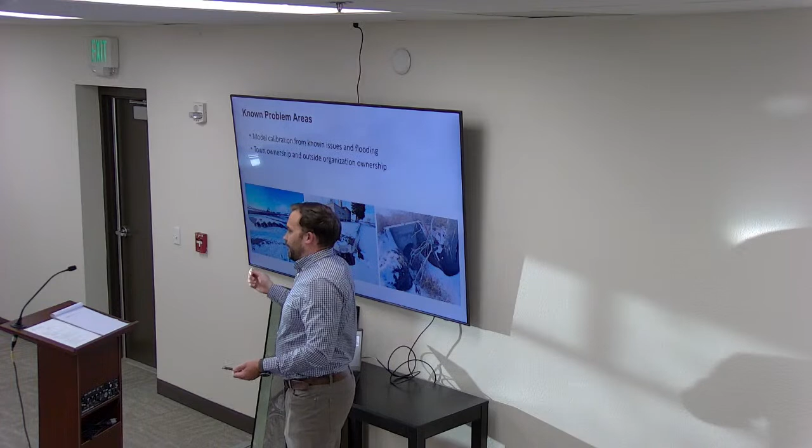So one of the other things that we need to consider, and this was largely fed by our field visit with Lauren and Andy, was known problem areas. Now, given that this is a brand new model, we needed something to calibrate it against. And unless you're extremely detailed and really curious about the depth of stormwater in a certain area, it's going to be hard to know that in the intersection of Main and First Street we had 6.8 inches of water. So when we're calibrating and validating a model, we need to know where the problem areas occurred and see if that agrees in the model environment versus what's been seen in the physical environment.

So just to give you some of the images that we looked at. Here is the crossing at Market and Highway 30, which is slated to be redone with a WYDOT culvert. So when we look at existing conditions versus future conditions, we incorporated WYDOT's design into the model. So that's already accounted for, and we're looking at how flows are going to be managed there.

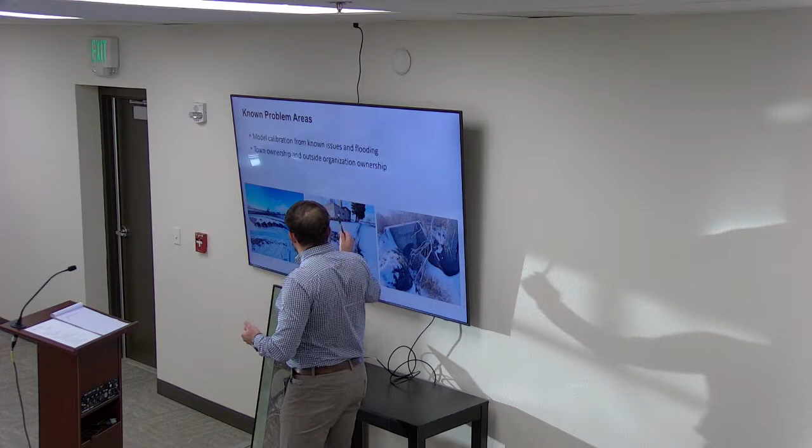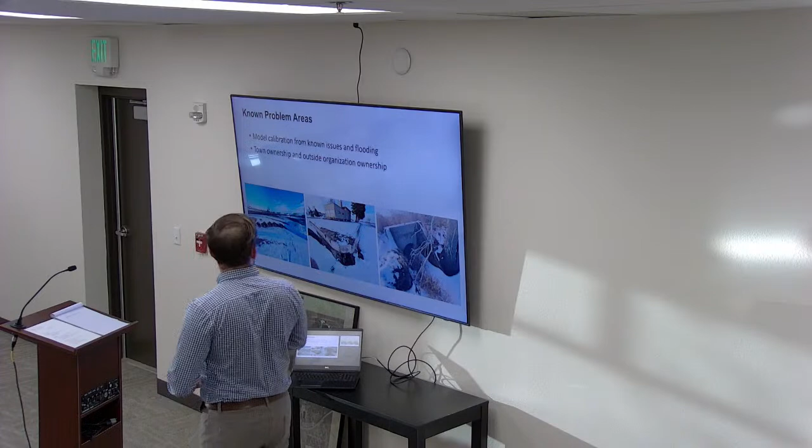Similarly, on the conditions side of things, and knowing that we have a fair amount of depth, we were able to go through. Our surveyors were in the field. They pulled sections on most every intersection that we had directed them to, specifically where there were inlets. So what we're able to do is, if we assume the worst case scenario, which granted would be above the curb, we can use the curb as a depth validator to say that, in a certain event, it's likely that it would fill up to this much, which is about a foot and a half in some areas on this curb for certain events. And then we tie all this in, we use this to validate our model, and then the next step is to run the model.

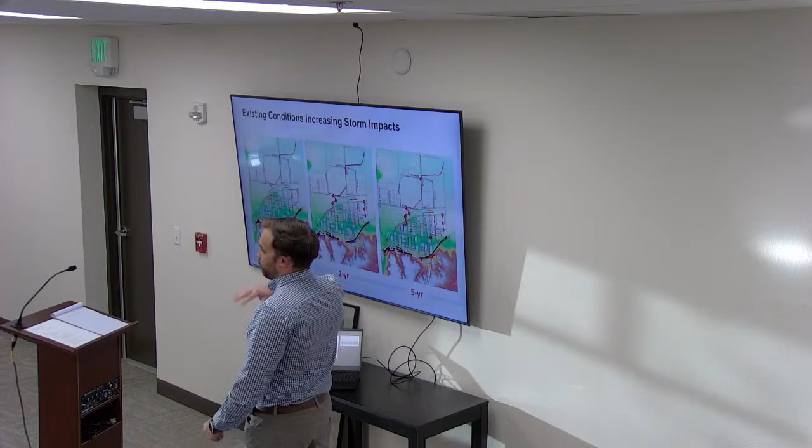So one of the deliverables from this project will be the fully functioning model in an InfoSWMM environment, so you'll be able to go through this at your whim and will to take a look at it and see what we've done here. But just to provide a little bit of perspective for this meeting, we went through and thematically mapped the existing network. Now, one thing to bear in mind before I get too deep into this: anywhere you see a big red circle indicates a node that has failed or has been surcharged to the point where there's overflow. So that's to say that if you have a 1 foot culvert in our model, and that culvert's failed, the water depth is well above 1 foot above the culvert and it's pouring over into a surface flow condition.

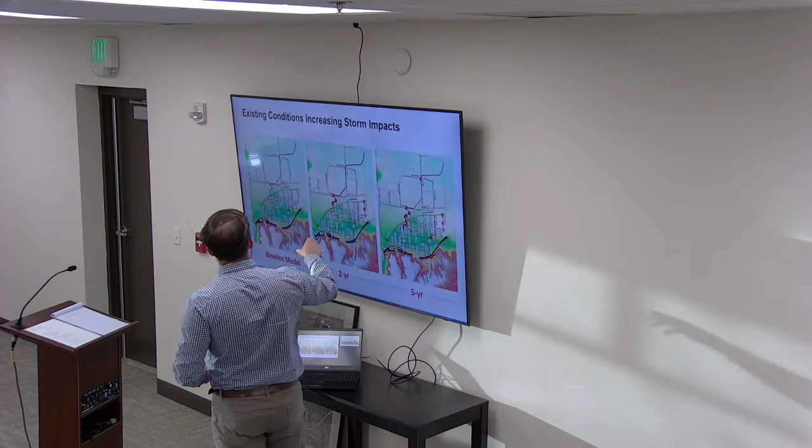So when we take a look at the baseline model, here's just the town. We haven't run any rain over it. That's the model network. The 2-year model is where things start to get interesting. We start to see failures in the area around Pine Bluffs Sand and Gravel, and then over here towards the Shrine and some of the eastern roads. Some of this, at least in the eastern portion of the model, was defined based on our own interpretation. Since there's not any direct stormwater infrastructure over there, we had to figure out some way to establish the links. But when we look at the 5-year event, you start to see that there are more points across the model that are failing.

Now, it's curious to note that some of these culverts and links are not necessarily owned nor operated by the town of Pine Bluffs, however they do affect you. So for instance, most of the points you're seeing here along I-80 are a WYDOT culvert that would be maintained by them and would have to drain effectively. So, baseline through 5-year, we start to see some failures in the 5-year existing conditions model. And as we advance this and get into the larger flows, here you can actually see, if we look at the line weight in between each of the links, the thicker it is, the more flow is being conveyed through that point.

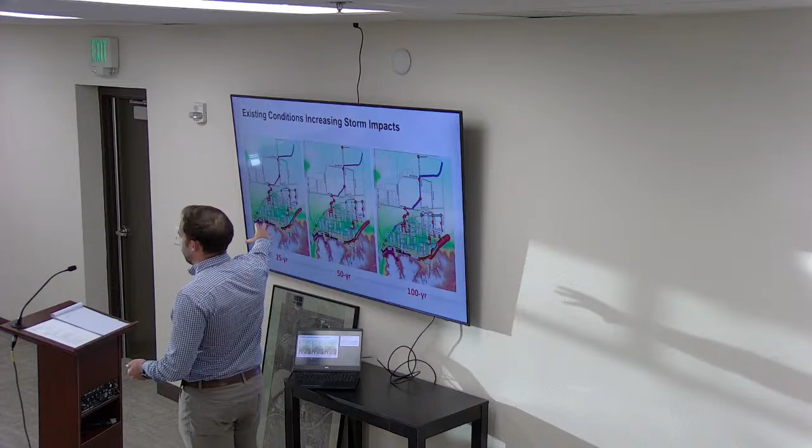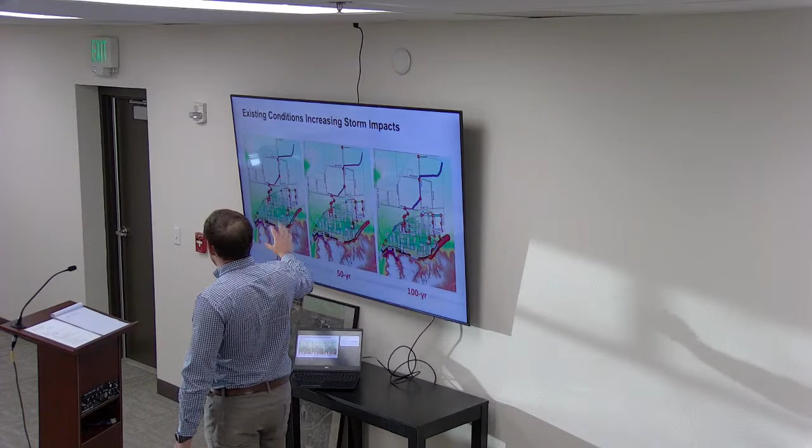And this will be something that will be further expressed in the master plan document itself, as to say, for an existing condition, 25-year storm, we're gonna be flowing, if memory serves, about 150 to 215 CFS down Market Street. It's a considerable volume of water. But when we look at the 25-year storm, you can see that most points across the system have started to fail. 50-year, kind of the same thing. The 100-year event is pretty much systemic failure.

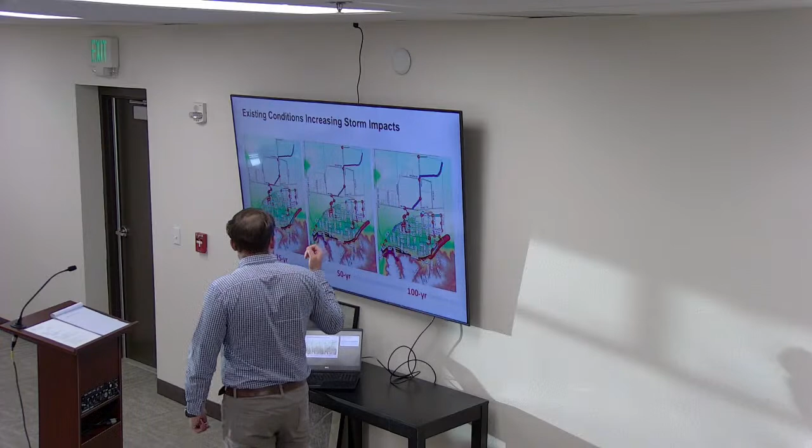It's a massive event. And at that point there's going to be issues no matter where you're at, with the amount of water that's going to come off of this. So the one thing that we needed to take a look at then was, what was the design storm going to be for the master plan? Some of this is to inform our efforts for design, and some of this is to help inform the draft ordinance that was developed.

So in looking at this, the one thing that's kind of curious to consider is compound probability. Now, compound probability, what I mean is, for a given year, if we look at a certain design storm, for instance, the 25-year storm, which we ended up electing to go with as our design event, we have about a 4% chance of a 25-year event occurring. Now, if we wait 10 years, that chance goes up to 32, almost 33%. So 1 in 3 chance of one event occurring within 10 years. So this will help us inform the priority in the selection of how we move forward with developing the CIP.

So with our CIP, we took a look at the areas that would have the largest benefit and tried to prioritize those with the consideration that we're designing for a 25-year storm and not looking at the higher events, given that the conveyance infrastructure would have been extremely large to convey the event appropriately. So, taking that into mind, when we took the existing model, the next step is to go through and develop scenarios to try and alleviate the problem that we'd see in certain areas.

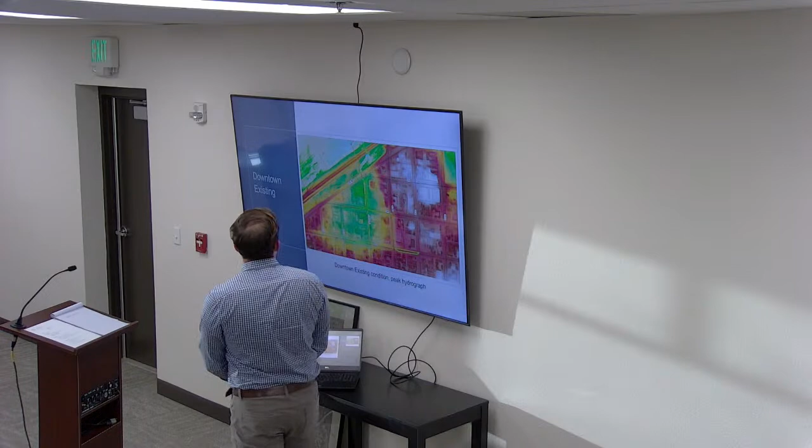So the first scenario that I took a look at, and there are many others that have been expressed in the master plan, was what would happen if we were to go through and modify the existing storm sewer, at least just for the downtown area. And the largest pipe that's currently provided in this storm sewer system, which you can see extends from Elm to Market and then up here to the outfall, is a 36-inch pipe. The 36-inch pipe at any one point in time is capable of passing around 50 CFS.

So the main goal here would be to upsize this as much as possible, try and get as much of that water off the streets into the storm sewer and out towards the North Wells area. So what I did here is I took a look at what would it take to get these depths down in the street along Market, 3rd, and Blair, and even here in the larger events along Market further to the south. I ended up sizing these up to about what would be a 6 foot by 6 foot box culvert equivalent.

Granted, this is just purely a sizing exercise, and further design would need to be done in the event that you elect to go through this, just to make sure that we're optimizing a solution that's going to be able to clear utilities, but still adequately pass the volume of water that we need to pass.

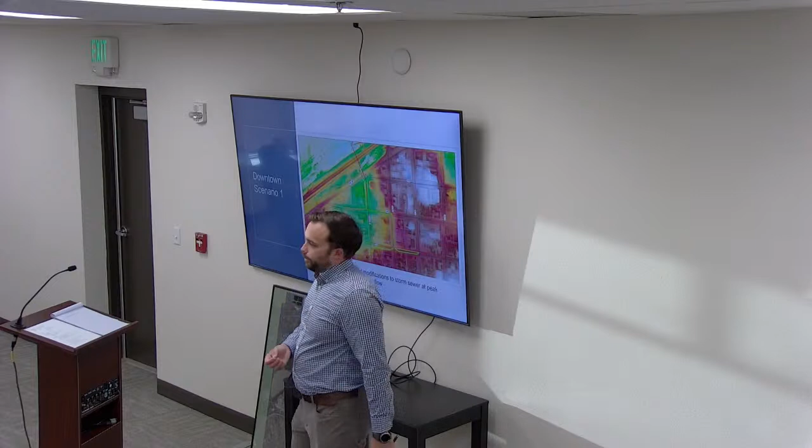Within this, also, alongside the upsizing of the trunk and the branch lines in downtown, I looked at what it would take to get all the water under the railroad, under Highway 30, and it ends up requiring about 2 pipes. The reason I tried to stick to around 2 is that no one wants to see 10 or so horizontal bores going under a railroad. They seem to get kind of touchy about that.

So what I looked at, in order to pass all the water from the downtown area, it's about 2 72-inch pipes worth of water that would be going under the railroad. So it's a fairly large endeavor to take an upsize to this. So kind of bearing that in mind, the next thought was to look at other solutions.

So the next scenario that we looked at for the downtown was what would happen if we purely upsized all of the downstream drainage going to the north. So currently, and I apologize that this map does not show that, there is a drainage channel that leaves from this outfall node and goes around to the southeastern entrance of Pine Bluff Sand and Gravel and curves up towards Road 213.

In this scenario, I took a look at providing a much larger drainage ditch and rerouted that instead of going around Pine Bluff Sand and Gravel to just go straight to the north, essentially, assuming here that excavation and easements are a lot cheaper than horizontal bores.

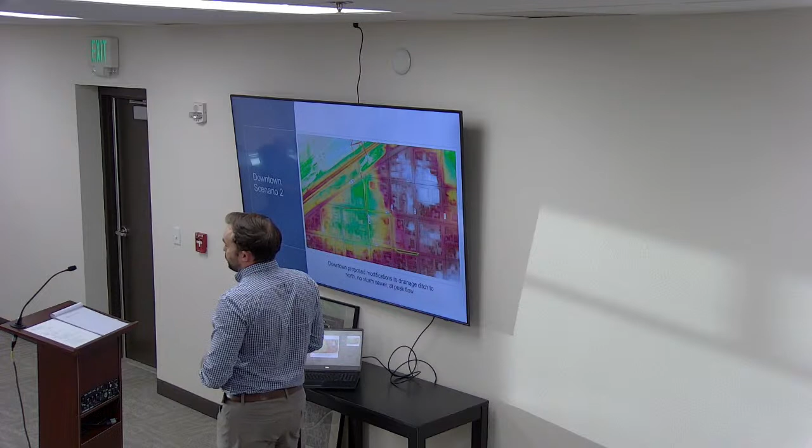So can you just tell me on there, you have that direct line going across and then you have the one further to the east. There are culverts at both of those? Yes, so these are culverts that have been installed beneath the UP line. There are 2 36-inchers and 3 48-inch culverts. But currently the straight one you show is non-existent, right? This line right here? Yeah, so that is in existence. That's the 36. So there are both of those already.

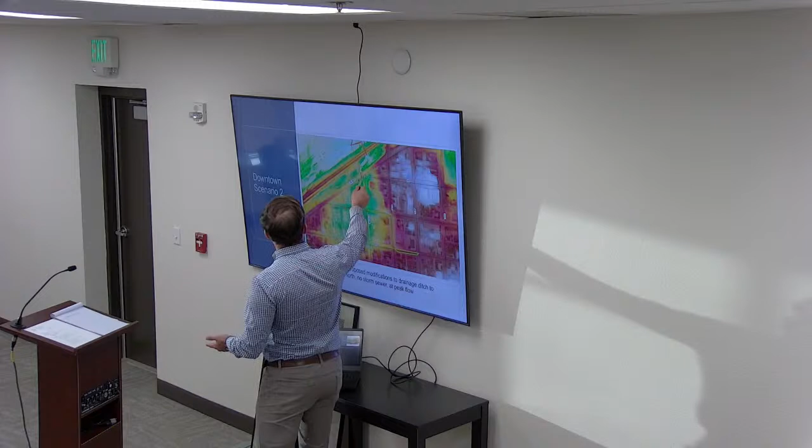Correct. Okay, thanks. Yep. And just the one thing we found, at least in the 25-year event, is that this line, which is the 36-inch line, is woefully undersized to get all the water off the street and out through there. So really working towards trying to optimize the capacity that we have in our existing system, but we're still gonna have to take a look at something here in town.

So, if we take a look at downtown scenario 3A, which is kind of a combination of the previous two scenarios, we look at expanding the in-town storm sewer and also doing the realigned expanded ditch to the north. We start to see much more promising results. Even without new culverts under the railroad? No, so this would actually require an enlarged culvert under the railroad. Okay. But there is, you're getting ahead of me. Sorry. No, so there is a solution where we do look at that.

And so within this, you know, we can start to see that our in-stream flow, or in-road flows are lessened. We're heading towards the right direction of getting below that 1 foot threshold.

And it's looking promising. So the final scenario, which would be combine all of these together, with the exception of upsizing the line that goes underneath Highway 30, and well, I guess this one would go under Highway 30, under the railroad, looks at enlarging the downtown storm sewer, enlarging and realigning the ditch going to the north, and placing an alternative drainage path, like the subsurface.

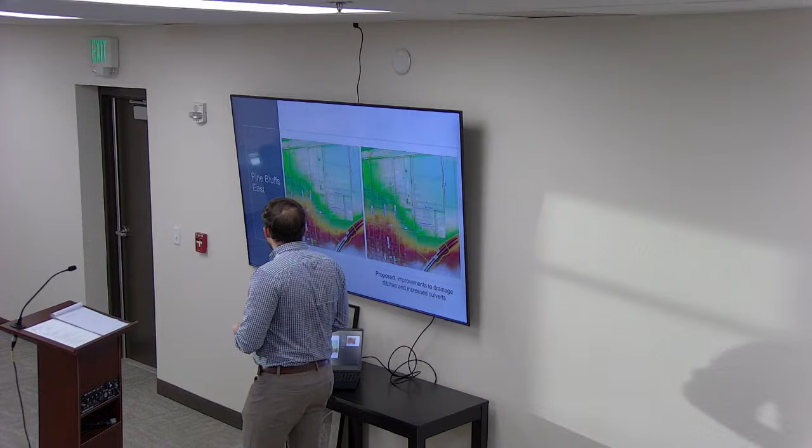The next area that we took a look at, and this one is maybe not as critical, but still, given that there's residential access in the area, it's one that we felt had merit, and especially through discussions with the town, it seemed prudent to take a look at. This is the area that we've referred to, at least for the slide, as Pine Bluffs East, encompassed mostly by the corner of 6th and Black to 4th and Walnut and along Butler out towards Highway 30.

In between the two images, it's a little hard to tell the difference. There's a slight shade change, which is kind of a symbology thing. What we're recommending here is to improve the drainage ditches and increase the number of culverts where practical. Where not practical, we'd suggest enlarging the culvert to accommodate a little bit more flow to keep it moving out and away from the town. If we add additional capacity and make it easier for the water to move, it'll drain faster and get out of the town and stop causing as many issues.

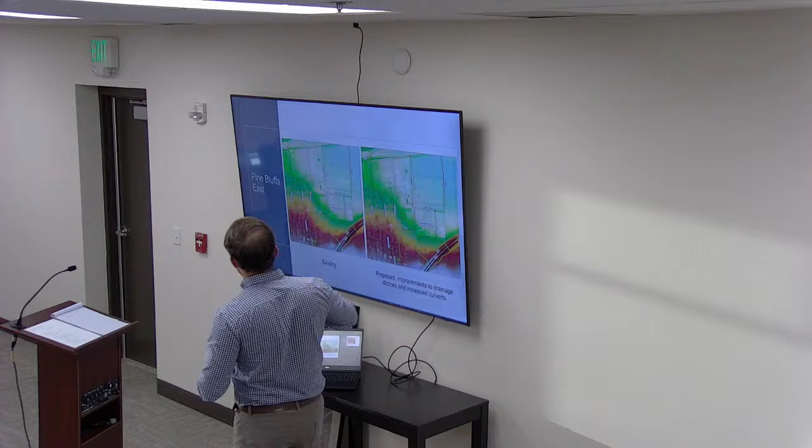I know, Kim, you'd spoken that there might have been some issues with erosion in this area. Yes. So at least we're proposing that you'd place energy dampening, energy management, just to handle those larger flows. As you flow more water, it has to flow faster, and there's more erosive force. So just for the longevity and ease of maintenance of the system, it'd be recommendations similar to that.

Looking towards the future, the one thing that has really been interesting to work through on this master plan is the development of the new subdivision here to the north of town. From my perspective, after having to manually delineate sub-watersheds across town, this was awesome, because now we can define all of our drainage areas, we can tell the water exactly where we want it to go, and it's functionally managed.

So the design of the new subdivision accommodates the placement of several culverts throughout the area, and a storage pond, which will function as a detention pond. What I mean by that is the water will flow in, it'll surcharge, and while it's doing that, there's an outfall that's going to be active, and it'll slowly drain over time. The key thing here, the detention pond becomes very applicable when you get to full build-out.

That's to say every single lot has been purchased, houses have been built, parking lots have been built. There's more flow coming off in the future condition than in the current condition, since it's currently a field. We don't want to send more water out to Lodgepole Creek than we absolutely have to at one point in time. So just from good engineering practice, we looked at a design that would allow us to discharge at the same rate as it's currently running off in the existing condition.

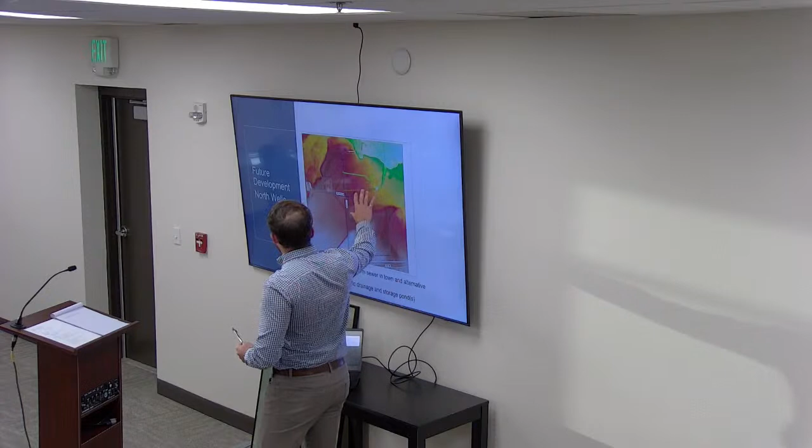We did, however, need to take into account the flows that would potentially come from the town if we do enlarge the drainage infrastructure. The one thing that was nice about this being a greenfield development is we were able to size the storage pond to pretty much whatever we like.

Taking into account the 25-year event versus designed to a 100-year event, the storage pond will act as a source of borrow, and it will also successfully mitigate flows coming off from the town and from the development.

So, we have identified most of the future scenarios from our perspective, and this list is by no means all-encompassing. There will be about 10 more projects that are going to be included in our summary, but just for the council's information, in advance of the rollout of the master plan, these are the 6, and this may be slightly different than what you have on your slides there. I will send out an updated version after this, of course.

Really, the first and foremost one, this is again all based on the logic that if we can alleviate the downstream choke points, we can increase the drainage coming off at a relatively lower cost. First one here being your Pine Bluff storm sewer outfall to Road 213. We take and broaden out the ditch, get a new drainage easement. The earthwork's fairly cheap. Within this, we do have one opportunity with the Pine Bluff sand and gravel lot, given that that is town owned, and again, this is subject to some speculation for the future on my part.

We have the potential to maybe turn that into a stormwater regulation pond, and this is similar to the detention pond in the North Wells. It would charge with the water that comes off of the town, and then slowly release into the North Wells, just making sure that we don't overwhelm our system downstream.

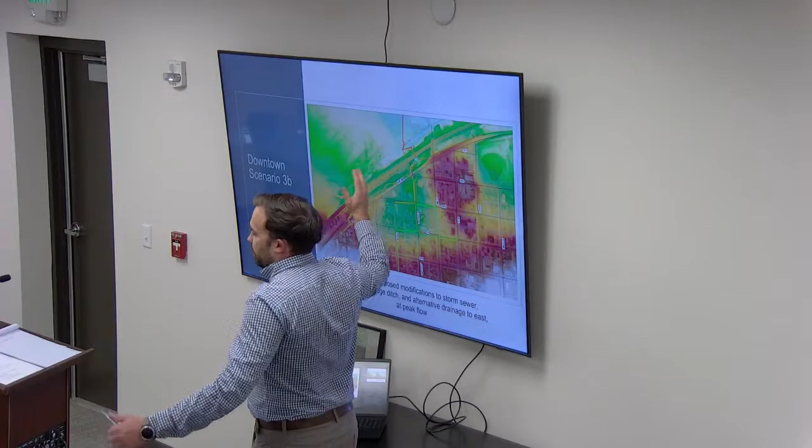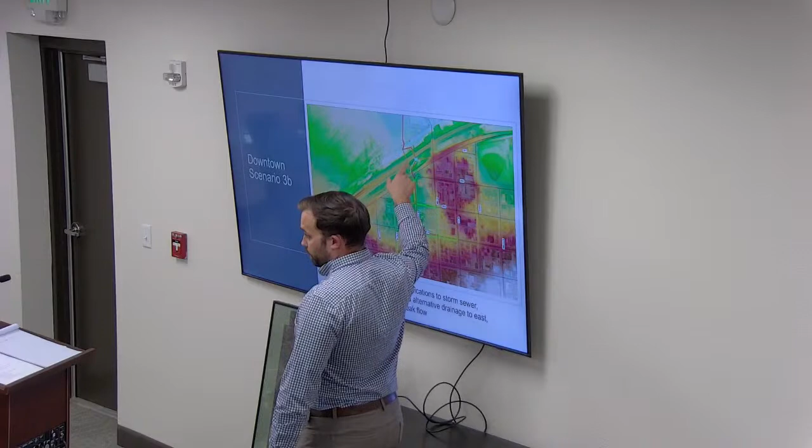We could just call it a loss, let it slowly drain and say we're good. But that was one of the drivers for us - eventually we get to a point where this surcharges, and if memory serves, we're looking at about 25 to 30 CFS worth of flooding that ends up coming back over these links, water just flows downhill. So if we're able to augment this storage a little bit, augment the drainage going out of it, while not interfering with the UP culverts, we can have the system behave a little bit better.

So in percentage, how much is it short of being able to hold it? In terms of a 25-year event? Off the top of my head, I can't tell you an exact percentage.

Just in terms of flow rate, just guess. I'd say it's probably about 3 times undersized - talking about the basin. Yeah, and granted, I'm basing this off of just what I'm recalling from the ratios of surface flow in the existing to subsurface flow, which is like storm sewer flow versus street flow. And the street flow, at least in the 25-year event, is about 3 and change times larger than the flow that's going out through the storm sewer.

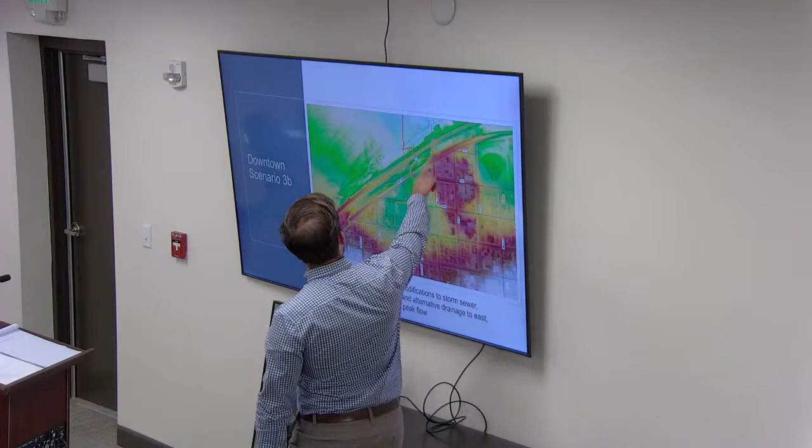Have you looked at the topography there? Well, I'm sure you have, but unfortunately we don't go clear to the right of way. So if we were to have to get clear over to our property going north, on the north side of the tracks, to straighten that out as opposed to going clear around our property.

Is that - they're not practical? Well, either way, we would have to cross them for a small piece, just for a little bit.

I can't speak to the railroad's feelings on this particular matter, but I would imagine that since we're further out in the right of way, they're probably gonna be a little more agreeable to it. They're still gonna have to follow their procedures as far as having people on site to take a look at it. But granted, this alignment you're currently seeing is just based on kind of my best guess, taking a look at the topography and figuring out what the best way would be to try and limit the amount of earthwork we'd have to do to get it there.

Now, that said, dirt work's pretty cheap. We can kind of pick whichever alignment we really want within reason. There are gonna be some constraints, just given that it's incredibly flat as we move out to the north. So we wanna be able to maintain as much potential slope as possible to get it to the North Wells drainage area, otherwise we're gonna end up with a very large puddle.

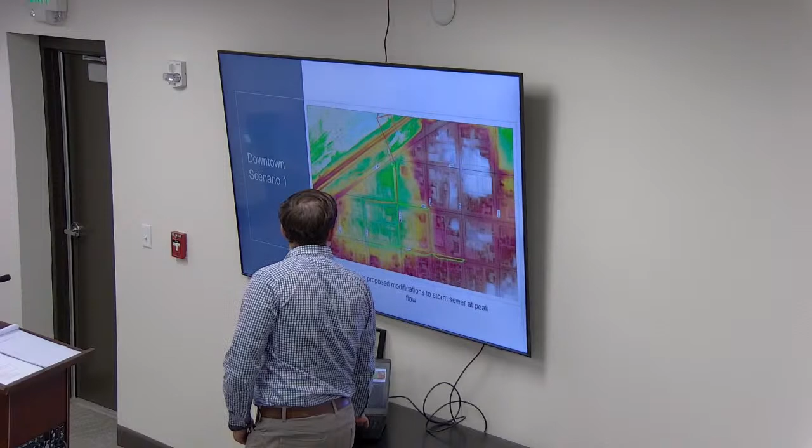Well, as you can see in your last picture there, that's what we get now. The first one and the last one in that area is obviously problematic, but the entire rest of the drainage on the north...

Wherever you show it here, but on the north - I'm not sure, there's this, I can't find it, but anyway, the big angle, it angles around the end of the circle on, I think it's on the north scenario. Here we go. So, just clear at the bottom of that. I would say from that data point, wherever the point where it turns northeast, right there - if it makes it halfway down that angle, I'd be shocked. Okay, like I mean - I guess ask me, or tell me where I'm wrong about this.

It seems to me that stormwater should be built backwards, right? We should be fixing - before we worry about fixing upstream, whatever's required there, that ditch should be cleaned, deepened, whatever's required to get the right flow from that, well further down than that, but at least there, we should be getting that fixed, right? Correct, and working our way back. Yep, before we make it worse. Agree, that's reflected in the master plan there, and probably, you know, we'll see further in the weeds on some of these other projects here today - that's exactly where you want to start.

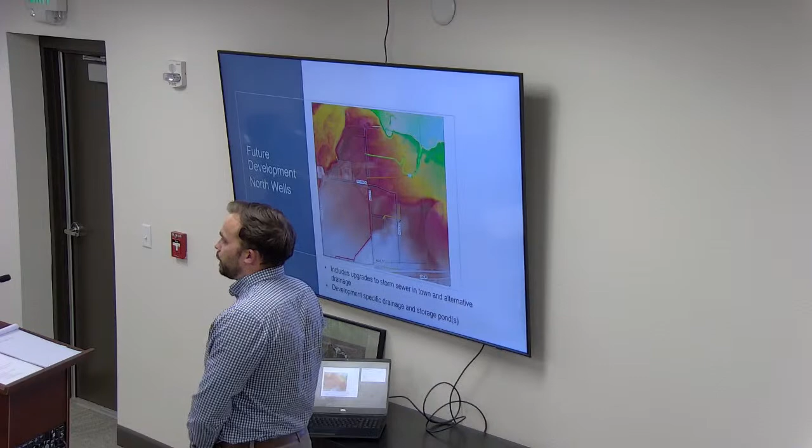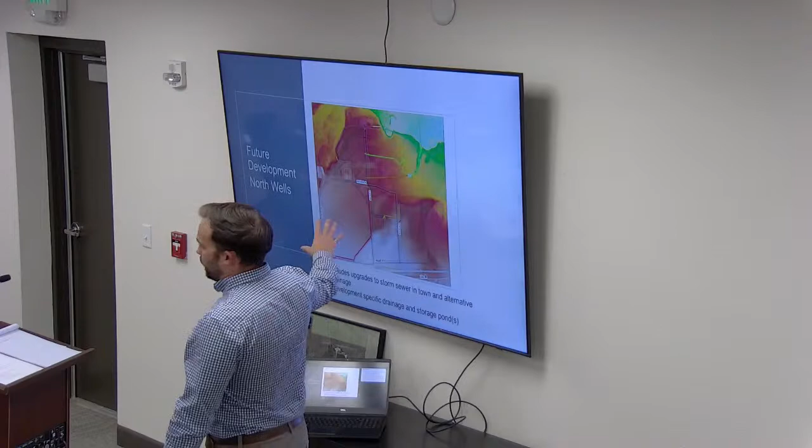My question is does the road, I know we have more right of way than road, but does the road need to be moved over to accommodate a bigger drainage ditch in that area? Not necessarily, and that's one thing we will double check before we get too hasty. And there are some modifications that we can make in terms of width and depth if need be. What you're seeing here is my kind of back of the napkin, this size will work sort of thing. That's not to say that that's the only size that would work. So there's variability within width and depth to that drainage channel that we can leverage as part of our design.

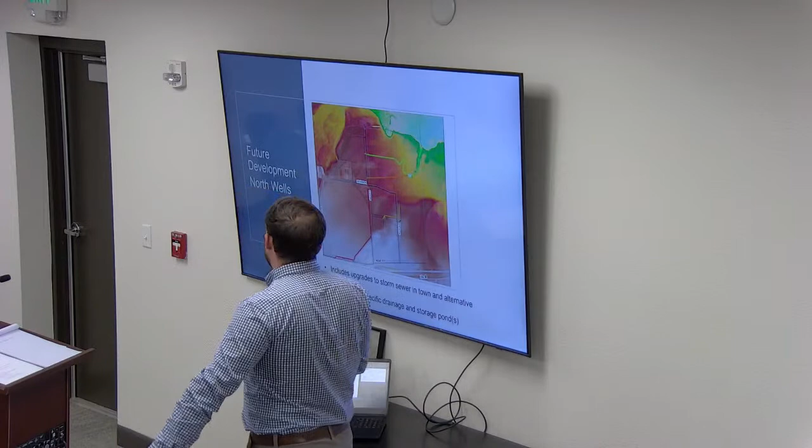And so not holding you to this, but do you anticipate that it gets so flat in that area with all the flow coming into it, that those ditches in the North Wells area are going to get pretty deep to accommodate the slope from that distance? Obviously, we want to minimize depth. No one wants like a 15-foot ditch. Right. We'll take a look at it, and where it makes engineering sense, we will do that. Within our recommendations, if we were to have our entire wish list done, that wouldn't be an issue. But if we're gonna try and counter this on just surface drainage and expanding the drainage ditches themselves, then we may be looking at a little deeper ditch.

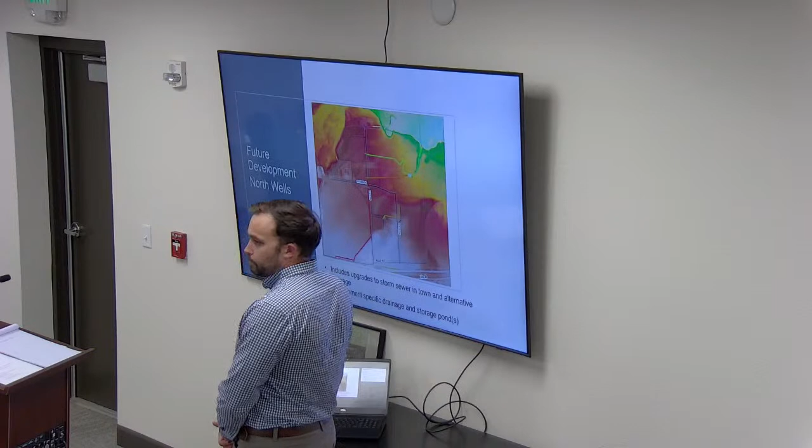And in the final master plan document, for your proposed projects, will there be estimated costs for each of those projects? Yes, there will. The costs have been done, and we're currently undergoing QC. Marcus, feel free to chime in on this one. It's an Association for the Advancement of Cost Engineering Class 5 estimate. That's the cost estimate you typically see from a 0 to 5% project design level. It's very high level. It incorporates a fairly large amount of slack on both the high end and the low end, to cover a broad range. So what you'll get with the CIP and the prioritization list is the project's location, how much they're gonna cost, and our proposed implementation period within 0 to 5 years, 5 to 10 years, and then 10 to 20 years.

And Mayor and Council, I bring this up mostly because, as with our community master plan, we have to have the master plan before we can go out and apply for other grants to actually make the repairs. Currently there is a BRIC grant application that is open until January, and we'll review our project list and apply for some additional funds. Generally, that requires a 25% match from the town, so we're gonna have to look at how much of a 25% match we can reasonably fit into our budget. And then we will apply for a grant to at least get going on some of these projects right away.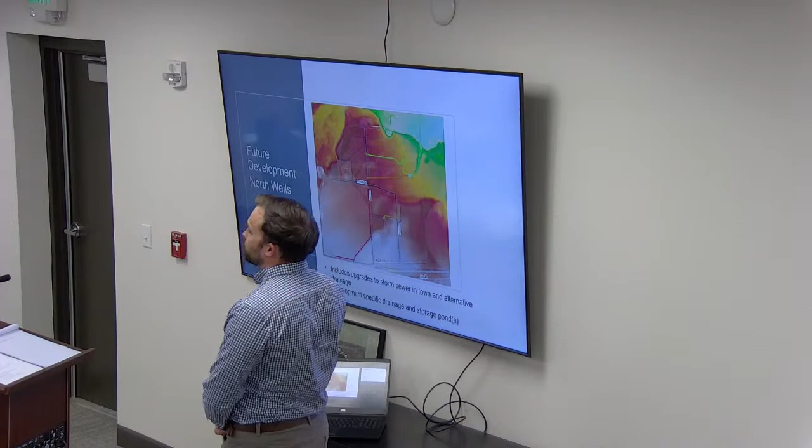I guess moving on to item number 3, review and approve EMS retirement plan request. Would you like to represent that, or you want Pat to represent that? It didn't really come from Pat, so. Sure, I can speak to that request.

Currently our EMTs and paramedics have an opportunity to participate in the Wyoming Retirement Program. Their retirement is a little bit different than regular town employees. They're similar to how the fire district operates their retirement. This is set by statute.

It's a nominal contribution of $18.75 per person per month, and I am recommending that the town pay for that full portion as opposed to dividing it by the $9.38 each. To me, it's a fairly cost-effective recruiting and retention technique, and I think our budget variance for the remainder of this fiscal year would be $600 and some change. Future budget variance would be under $1,000 per year total for all the EMTs we currently have on staff.